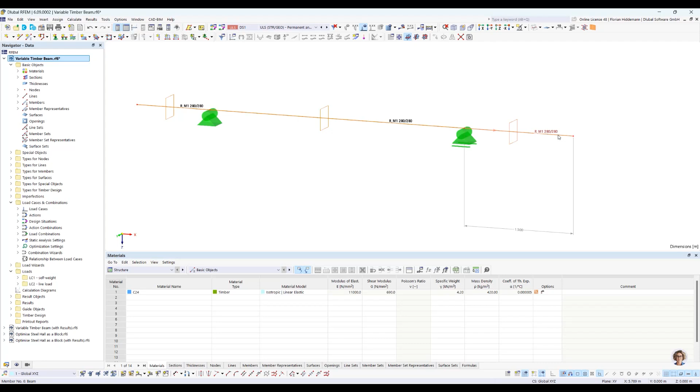So let's dive into the program. And as you can see here, the first model is a variable timber beam. This one has nothing to do with blocks at the moment. It's just for demonstration purposes of the new features I just explained in the PowerPoint. So what do we see here? We have an easy static system. It's a single span member, and at the ends there are some members reaching out on the left and on the right side. It's a rectangular cross-section. And of course, when we are dealing with optimization, there are some global parameters in use.

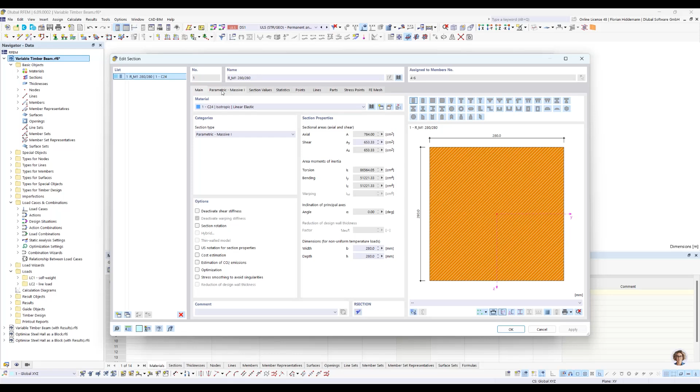So we start here with a 280 by 280 cross-section with C24 timber material. And as you can see here, the cross-section width is given with a global parameter and the cross-section height also. In addition to that, the distance of the right support is also variable. I can show you now here the overview for the global parameters. The beam length is just a constant, which is easier for me to make the model. And the left support distance here is just a constant.

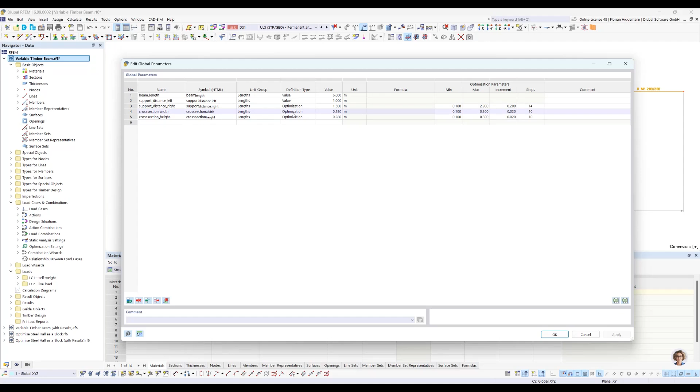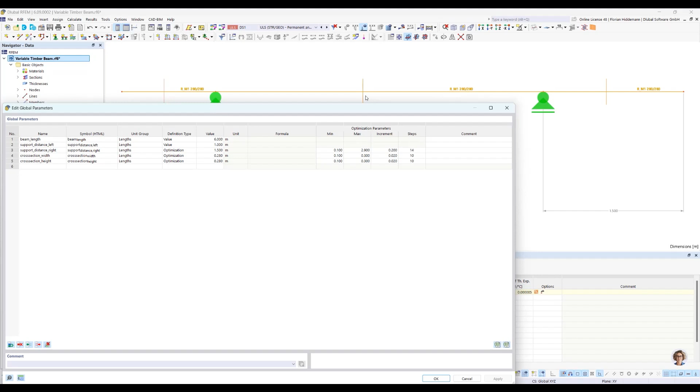And we would like, in this little example, to find optimal solutions for the right-hand support distance, which is now 1.5 meters, and for the cross-section width and height. This parameter here, the support distance, can be varied with 0.1 meter from the right side up to 2.9 meters, which is nearly in the middle of the beam. The cross-section width and height go from 100 millimeters to 300, in steps of 20 millimeters. So you have 10 steps in between, and this is the variation this cross-section can take into account.

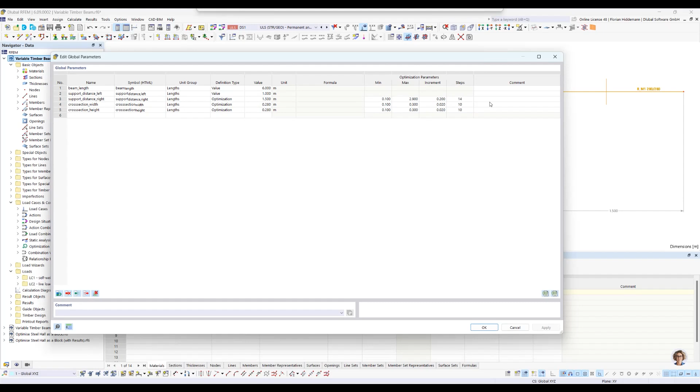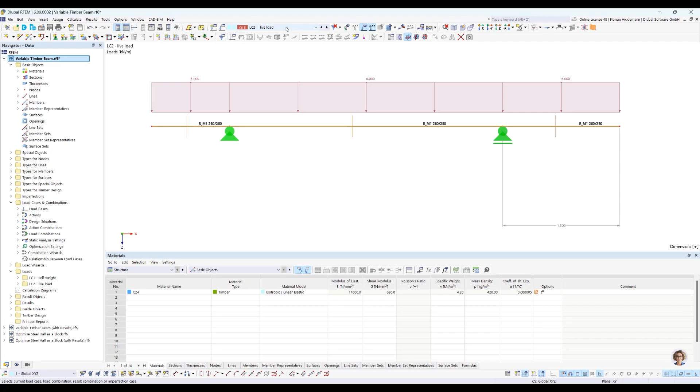So let's have a look at the first feature: recognizing valid mutations in the result list. So for this reason, I activated also the Timber Design add-on. As you can see here, Timber Design is activated. And I just made, for demonstration purposes, easy loads. You see load case 1 with some self-weight. And there's another load case with a live load. We use here the German National Annex, of course, and a combination with it. So you can see design actions. It's all standard, which you are maybe used to already, that we do some combinations and design situations for you.

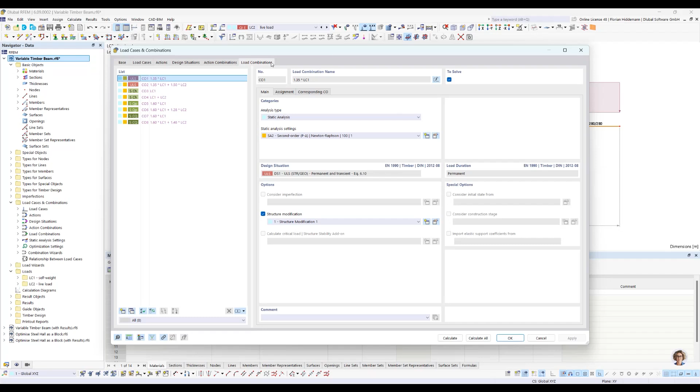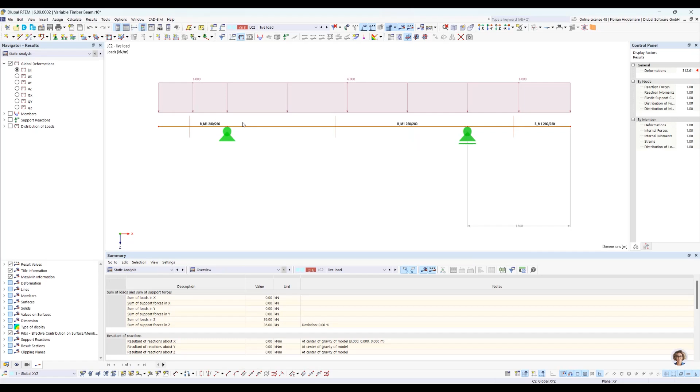So you don't have to worry about all the timber design specialties. So let's calculate the system in the first place to see what we are talking about here. So now it's a standard calculation without optimization. You can see in each run later on, all these calculations are performed for each mutation. And as we can see in the governing results of the design add-on, everything in this configuration looks fine.

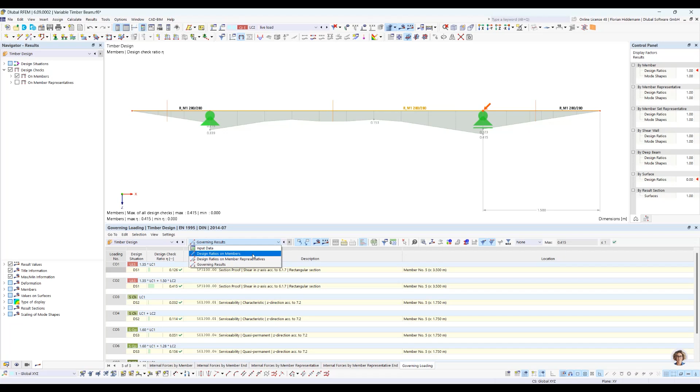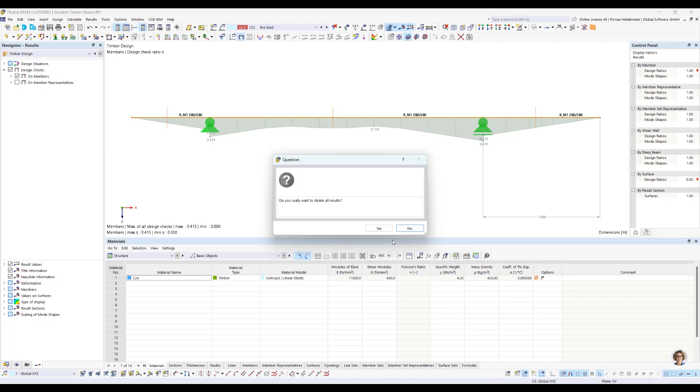But we are here to find out if there is an even better configuration or not, and to play around with our optimization feature to see what is happening there. So let's delete these results and jump into the optimization settings. You can find it here under Calculate if the optimization add-on is activated. So you can store different optimization settings. It's not necessarily one you have to fiddle around with. You can copy it, modify it, and use them for different purposes. This is quite handy because there are a lot of settings you can do, and so you can remember each different optimization run later on.

So what do we do now in the first place? This feature I show you later on. This is the multi-stage mode, the multi-stage calculation. And even with this very simple system here, all mutations would have a total number of 1,815 optimization mutations. This is a lot if you consider that this is a very easy and simple system here.

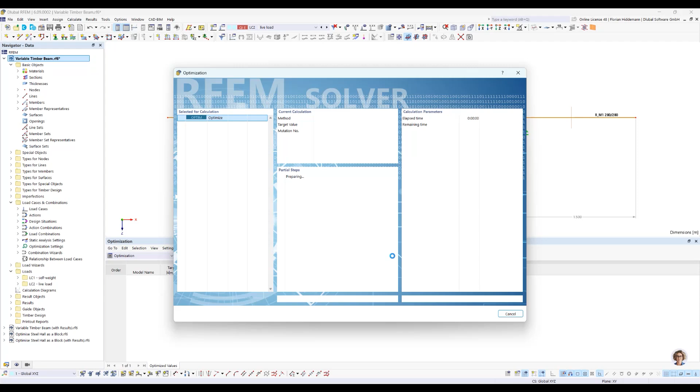So as you can see in the background, the first iterations are calculated. Each one of these mutations is also calculated within the Timber Design add-on. And for this reason, you see model number 1, calculated with these parameters, didn't fulfill the design checks. Model number 2, like in our first example, fulfilled it.

So with this algorithm here, it's just a random mutation. Here is no clear strategy for finding the optimal target value. The program at the moment is just giving random examples for these 3 values or parameters and collects all the results. So with this nice feature here, we can see easily which calculation fulfilled design checks and which not.

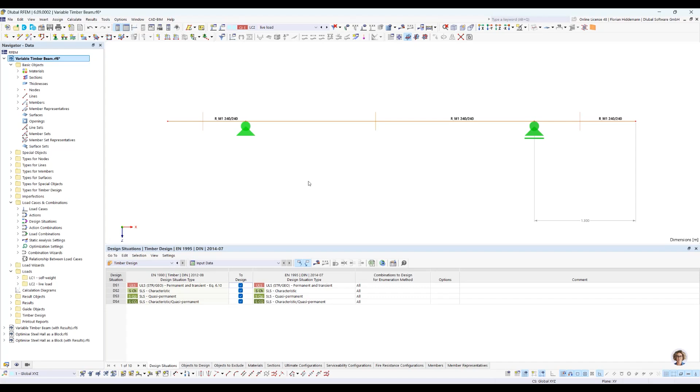And now if I cancel this calculation run here, today I will be mean to this model and cancel it anyway. So what you can see here, the calculations you performed up to this point are stored. We have now 8 results. And as you can see here, the green checkmark means, it's very important to see it again, this model is now active, and because I canceled the calculation run, the add-on doesn't calculate the last cycle. So if you jump into a new model in the list, you have to calculate the model itself.

We store only the results you can see here in the list. Obviously, we don't store every full result which is calculated for each model. If you have a bigger model, that would be hundreds or thousands of results. But we collect the target value and everything you need to display this result table here. From this point, you can then regenerate your model because the add-on is varying the parameters like they are stored here in the way the model mutation shows it.

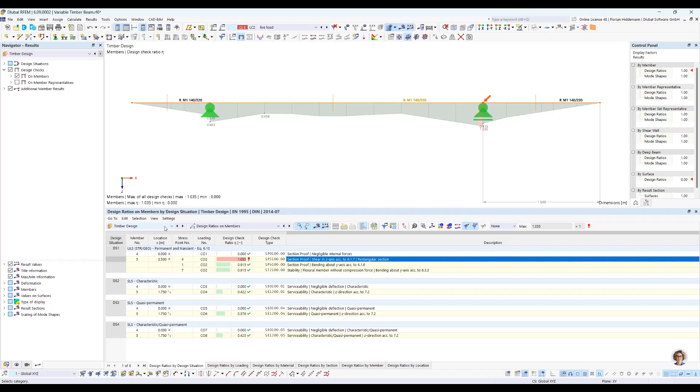The next feature, the results list remains consistent. It's easy to show now because I canceled the first calculation run, and maybe at a later point, for example now, we would like to go for a new optimization run. So all I do now is say, okay, try to optimize it with a particle swarm, calculate 2% of the possible optimizations. As every time, I make the optimization cycle here active. This is kind of a safety feature so that you are really aware you're performing an optimization run and not doing it accidentally if you calculate all.

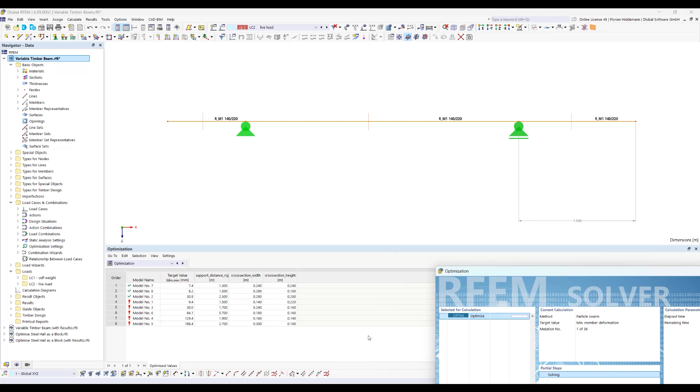Okay, so what will happen next? Let's see. You can see the results list here is stored. There is no new list, and this is a small feature, but very useful if you already spent some time with your model and calculated it, because now the optimization add-on checks each new mutation. Before it calculates it, it looks up the result table and sees if this mutation was already calculated upfront. If this is the case, we jump automatically to the next mutation without calculating it. And if the model mutation is a new one, which is not stored in the list, the add-on just calculates it and adds it, like you can see here in the background.

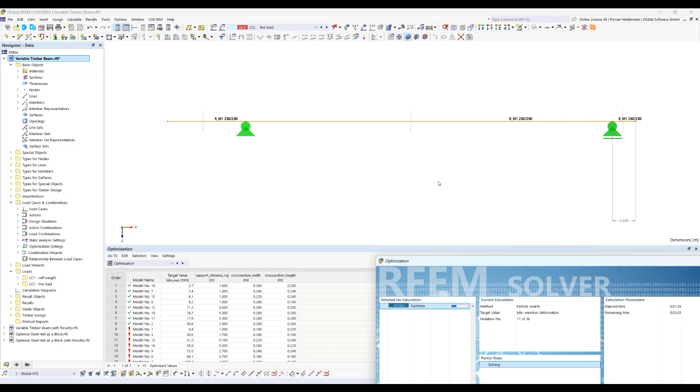So as you can see here, now it's more straightforward because the particle swarm is a solving algorithm which tries to vary these parameters with the target value in mind. And the more you calculate, the more it gets, let's say, a mathematical feeling for which parameter needs to be adjusted in what way to achieve the best target value, which is at the moment the minimum member deflection at every point. So the 2.7 millimeters, let's have a look into the program and cancel it again.

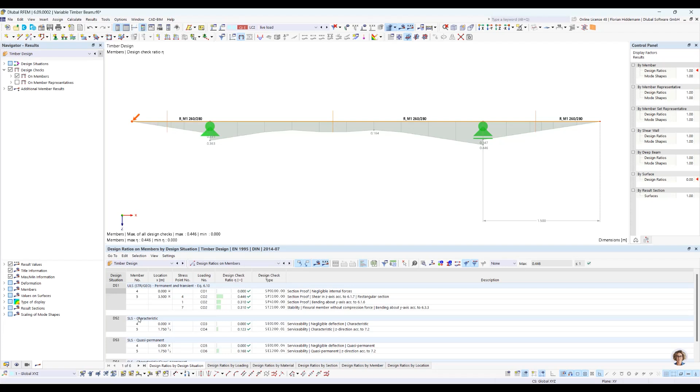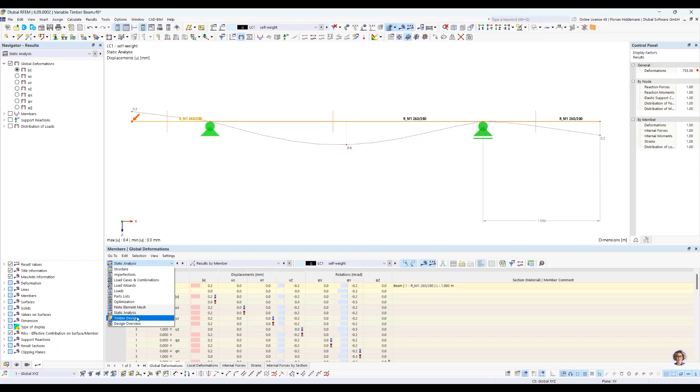Because we aborted the calculation, I need to perform a manual calculation of the system here. So let's see. Every design check is fulfilled. And for the target value, it should be there. I go to another model. Okay, yeah, I found it.

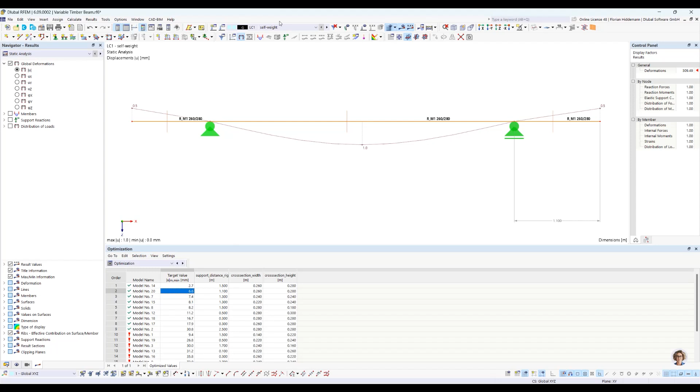Okay, we are looking for 6.6, and this is considered overall design situations. You set it up so if I go to the maximum load here in design situation 1, the ultimate limit state, here you can find it's this part here in the members, 6.6, and this is considered as a target value. It is looking for a global minimum to minimize the maximum member deflection at any given point. I give you some time to let it sink in.

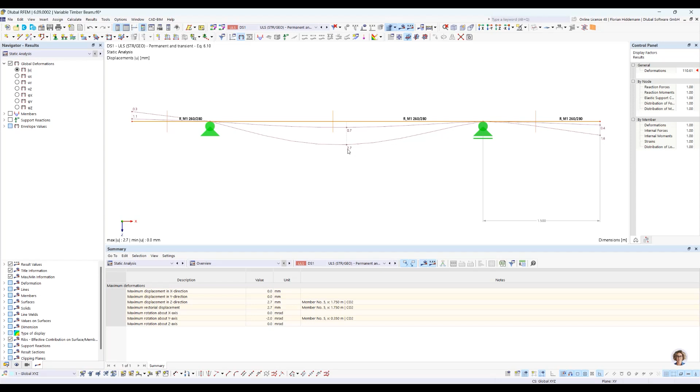And now we are able to find the 2.7 millimeters. Just to be sure what is going on here in the background: you can see the 2.7 at this point. So this is a small introduction example for working with the list here and the ability that it stores every optimization run. Let's go to the next topic, the sensitivity factors. What is going on with that?

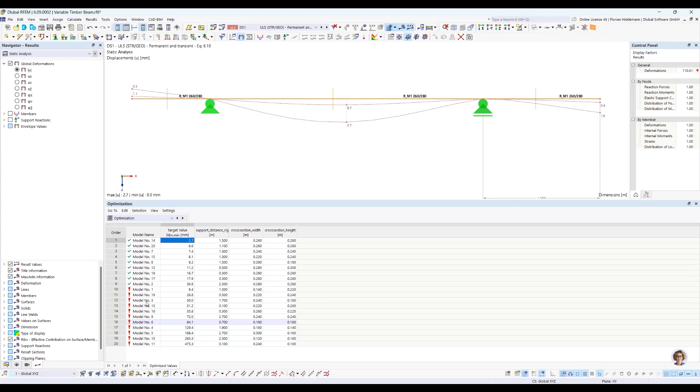In the model now, we have 20 model mutations calculated. And now here in the table of the parameters to optimize, you can see some sensitivity factors. They are now estimated from the model results list here. So we can now perform an analysis of how the target value is influenced by varying different parameters. This estimation gets more accurate the more models you calculate.

And with this small amount of 20 models, you can see the cross-section height has a big impact on the desired member deformation, a much bigger impact than, for example, the cross-section width. If you're familiar with how the stiffness in such a system works, that's absolutely plausible, because the height of a cross-section goes in with the third order, and the width with the first order, into the stiffness of this beam. So it's a very plausible result.

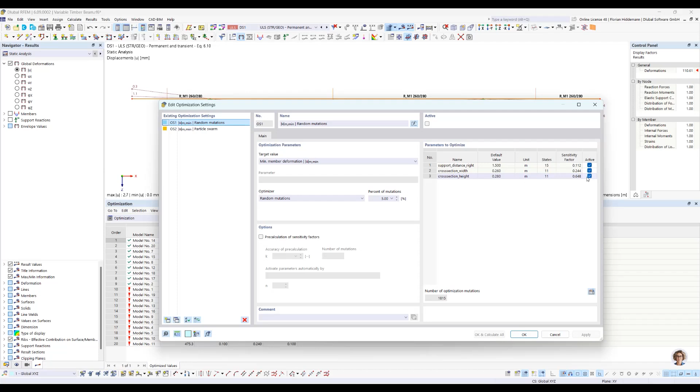And these two parameters here have much more influence than the support distance. That's something you can already see in this little model. Here, it's easy to have an overview by yourself, but think of more complex situations where you vary different parameters and you don't have a feeling what would happen if you vary different combinations. This is very nice to reduce the number of optimization mutations, because you can decide, okay, if these ones are so impactful, why should I vary and spend my calculation time on this one?

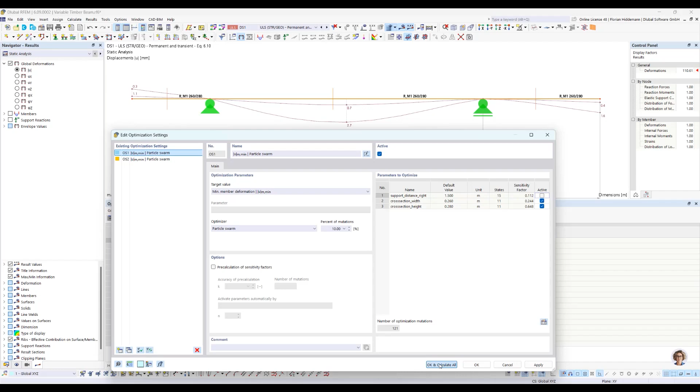And as you can see, it reduces the number of optimization mutations drastically, because now it's 11 by 11 and not by 15 anymore. So here we have 121 mutations. And this is much easier for the algorithm to find more potentially better mutations. So now, because I set only these two parameters as active in this dialog, the model fixes the 1.3 meter support distance and just varies the second and third one.

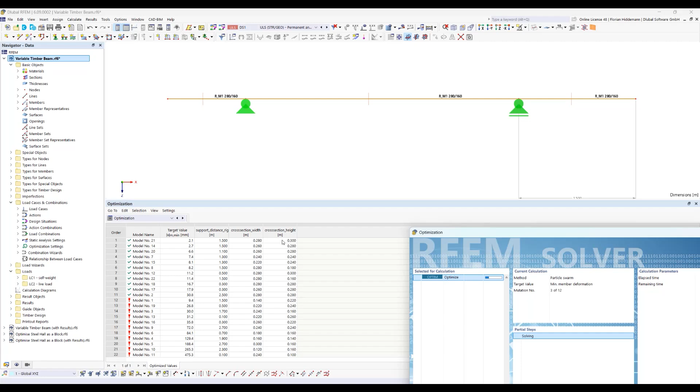Okay, this as a basic introduction and overview of our new features at this stage. I can show you the multi-stage calculation as well, and for this reason I would go back into the settings, choose other optimization settings here, and now we have a look at this option here, the pre-calculation of sensitivity factors.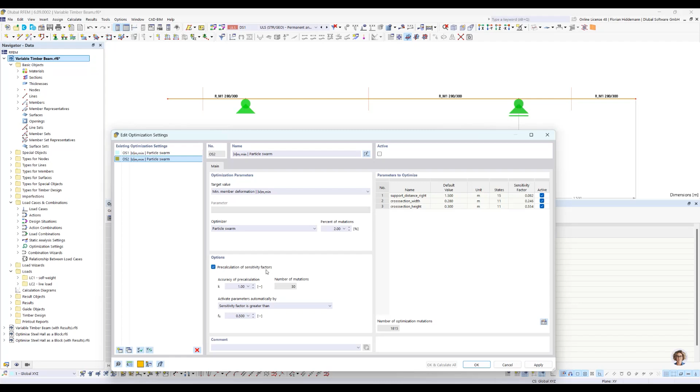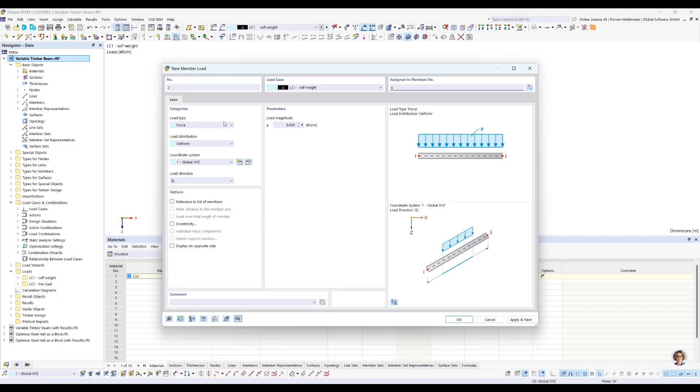For this reason, I will empty this list by varying the model. This is something you need to do now, because the list is stored. What I do now is delete a load here. And if you change the model in a drastic way like this, all the results are deleted. So be aware that this will have an impact on your optimization results. So now we can start with a clean structure here.

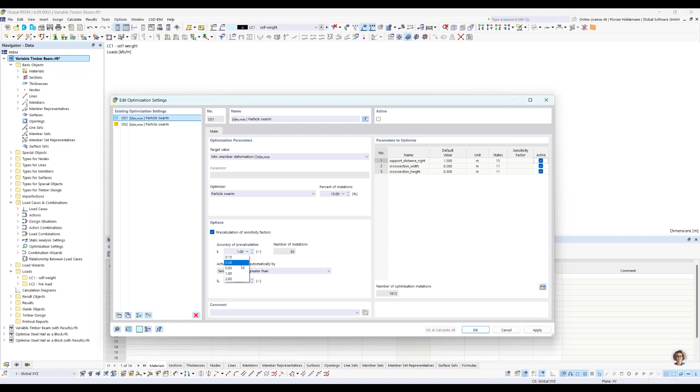And for the next run, I say, please make a pre-calculation of the sensitivity factors. And in this example, let me make only a small guess with, let's say, 5 mutations. And after that, the program should automatically combine 2 parameters with the highest sensitivity factors in each following optimization run. So it's a bit abstract and complicated, like most of the things with this add-on, but let's see what is behind it.

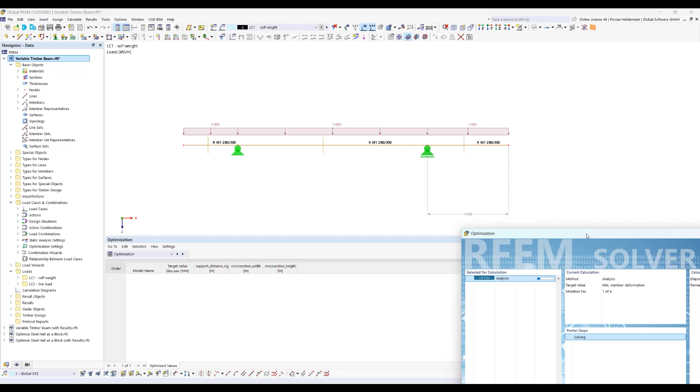So now we have a multi-stage calculation. In the first place, we are doing the analysis. So the model is now varying some parameters with a very small amount of models to guess the sensitivity factors. Yeah, it's analyzing the results here and the estimated impact of these parameters to those result values. And as said before, the more mutations you calculate, the more accurate is this estimation.

And now it goes to a second step. It uses now the results from the analysis. And here it is now combining the two most influential parameters with a particle swarm that calculates 10% of these possible combinations. And the 10% is now only 16, and it's not 181. I'll show you it afterwards.

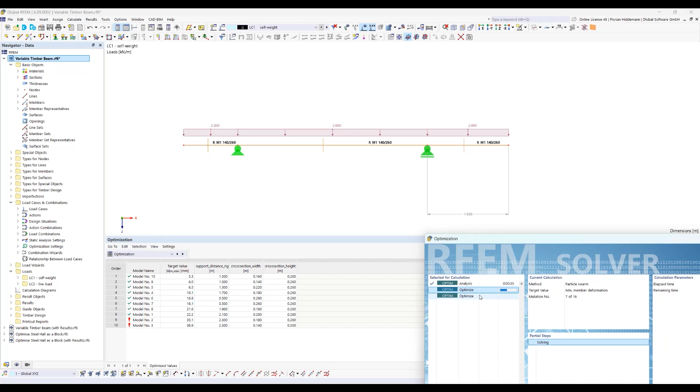And you can see after this optimization run, there is another optimization run waiting. In the next optimization run, the program goes further and says, okay, I have now combined the most influential with the second influential parameter. And just to check it in another run, I perform a calculation with the second best parameter and with the third best, because you choose to combine two parameters at the same time. And this is the strategy the program is choosing to go through these combinations.

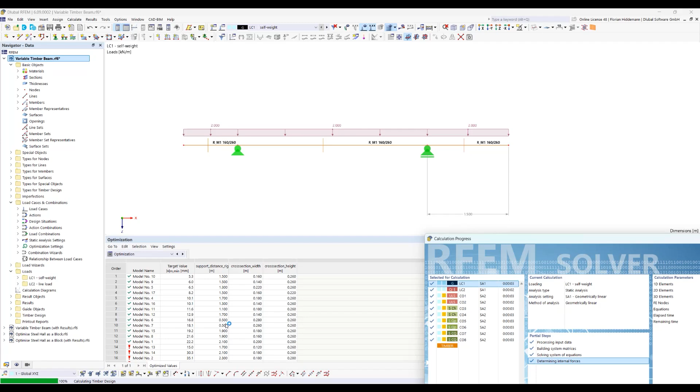So the total amount of calculations is the first one from the sensitivity factors, 4 in this example. And after that, it's here 16, and then depending on the other value, around 15 to 20. And it's much less than 10% of all 1,800 model mutations. Interesting. So let's have a look into the dialog, what could happen here. As you can see, we have with only 17 calculations quite some optimized results.

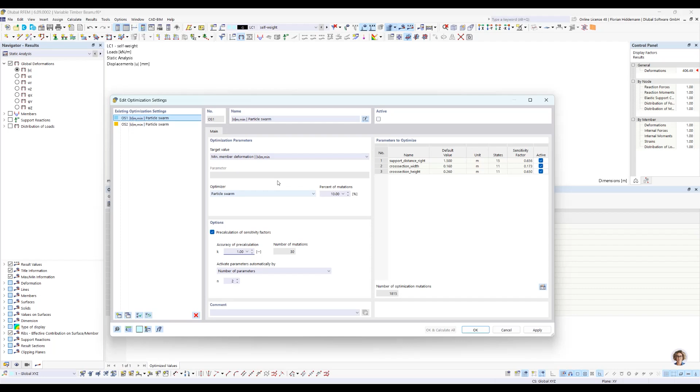But with a small amount of calculations, the sensitivity factors are not guessed very properly. Here it's now a very big difference on these ones. And you can do it better by giving more accuracy of the pre-calculation with, for example, 30 mutations. So our recommendation here is to choose higher numbers if you feel the calculation is not so straightforward. But this for now to demonstrate the possibility of our multi-stage calculation run.

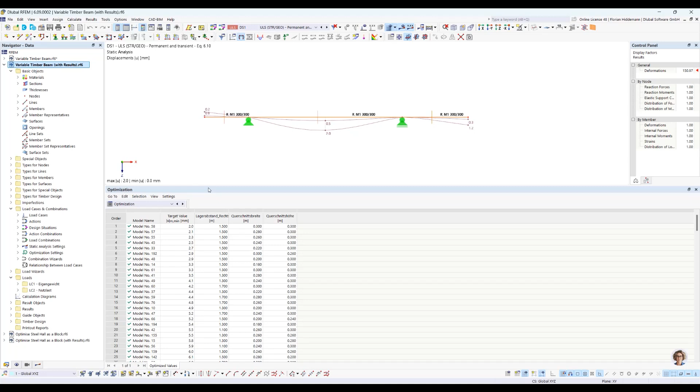If you have already done more calculations, I switch to the same model here. And I did a pre-calculation. So we have here 217 calculated models. As you can see, the sensitivity factors here are more accurate now, because there is a big result list which is analyzed. And this is much more plausible from an engineering point of view. What is interesting now, that's also a nice feature. It's new because we have a consistent result list now. You can change the target value afterwards.

So for now, we did the minimum member deformation at a specific point as a target value. So obviously the height of the cross-section, the width of the cross-section, and the support distance. I'm sorry that these are German words here. If I had translated them, the results would be deleted because it's changing the model. So I'm sorry for that, but I hope you can go with me. This is the support distance on the right side, the width of the cross-section, and the height.

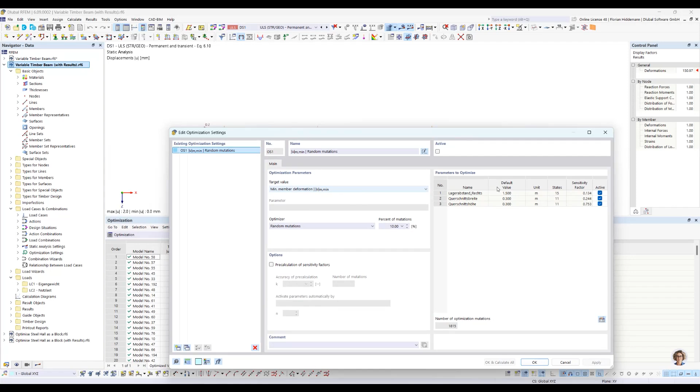And obviously, the support distance should have no impact on the weight of the model, but the height and the width should be more or less equal, right? Let's check it. We switch now to the minimum total weight. And as guessed, these sensitivity factors are now changing, because if you are varying the width and height, these influence the area of the cross-section in the same way. And guessed correctly, it's quite equal.

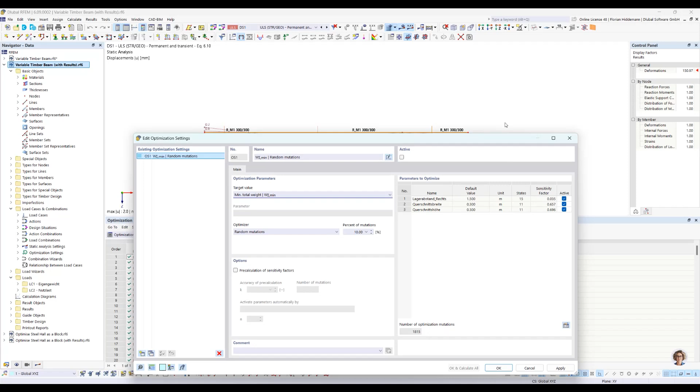And the supporting distance here from the right side has in reality absolutely no impact on the weight of the construction, because it's just a load bearing point. What's interesting, the more you calculate, the more this value will go to 0, because it's an estimation based on the list here, and our algorithm is already seeing with this amount of results that the influence on the desired target value is very small. So this is quite nice to see what you need to vary in your model to achieve specific targets.

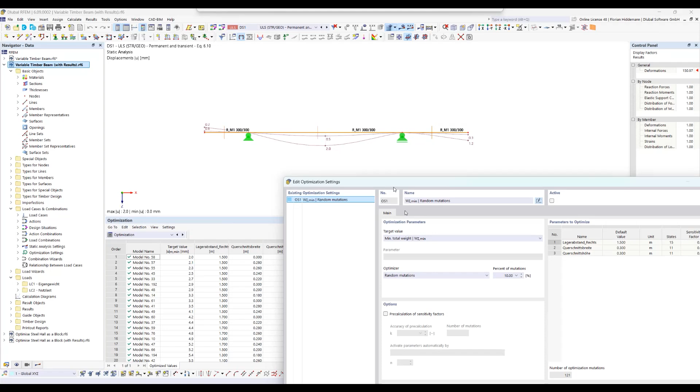You can see here in the list, if I change the optimization value and start a new run, so let's do it with a particle swarm. Just started. Let's see what happens. It's now changing. And this is also a strong feature. You can use all your existing calculations for this. So we have now 200 already existing calculations, because we stored the target value in each previous optimization run, as well as the desired minimum deflection, if there are surfaces, the minimum surface deflection, and so on.

So every available target value is stored with each mutation, even if you didn't activate it in the dialog. And this is very useful if you have different perspectives on your construction and you want to try out which one is the best for the minimum total weight and which one is the best for the minimum deflection. It's the first step into multi-target optimization runs. Behind the scenes, we are already thinking about those features, but it's a step-by-step way going to these goals.

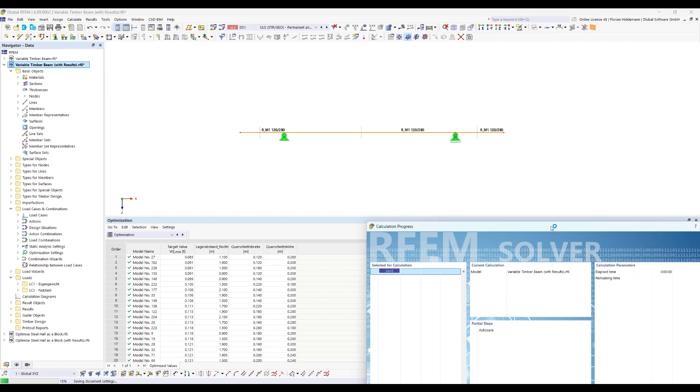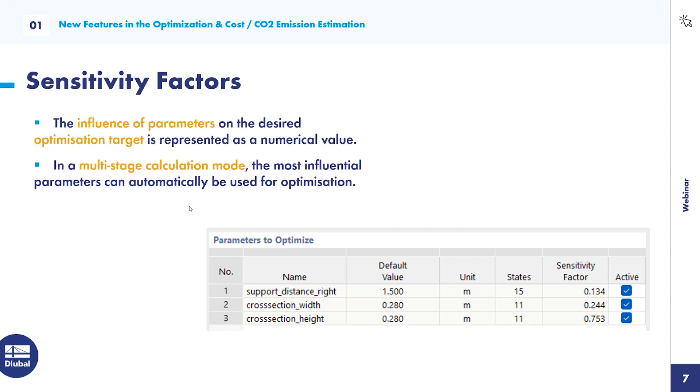Okay, so now you saw everything. We can change the optimization targets. We store it across different optimization runs. We have a multi-stage calculation mode, and maybe you are already waiting for the title-giving feature of this webinar, the optimizing blocks.

This is just an inspiration because maybe you found out in the past, if you are working with global parameters, there are some restrictions, because global parameters are very, very useful to play around with the geometry of your model. And you can use it in so many input fields that are quite helpful to steer your model and create the geometric system you would like to have, and also add static values, resistance values in many different ways.

But maybe you experienced also some restrictions when it comes to demanding construction rules. If you have a more complex statical system or construction you want to try out, you can use a block, because blocks are perfectly fitted to generate your model with your own specified rules, algorithm, programmable. With a block, you can build your own configurator. And this configurator for itself takes input values.

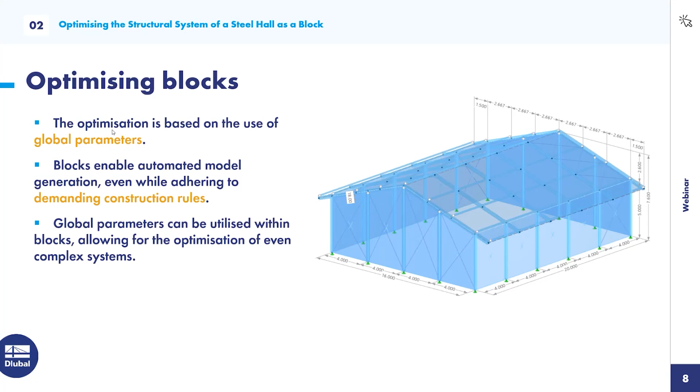So at this point, I would like to make some advisement for next week. If you didn't have any contact in the past with blocks, in 1 week, there is a webinar from Andreas where he presents some features, including also the blocks in a more detailed and specific way. So if you're interested to see more of blocks alone, maybe you can join the webinar next week if you have time. And for today, I will show you how to use the optimization together with a specified block.

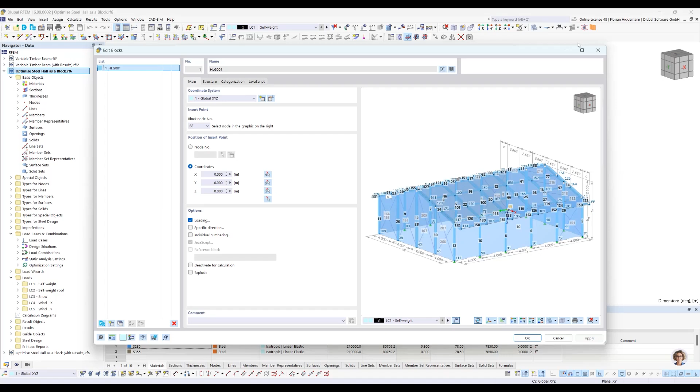So I've done some pre-work here because this needs some time to set it up. And so I would like to present what I did here and to show you what is special about this model. So in this model here, as you can see, this is everything. It's a block. In the webinar next week, you can see, if not already known, how to edit it, how to import it from the Dlubal Center. Here for the moment, let's just stick with the idea.

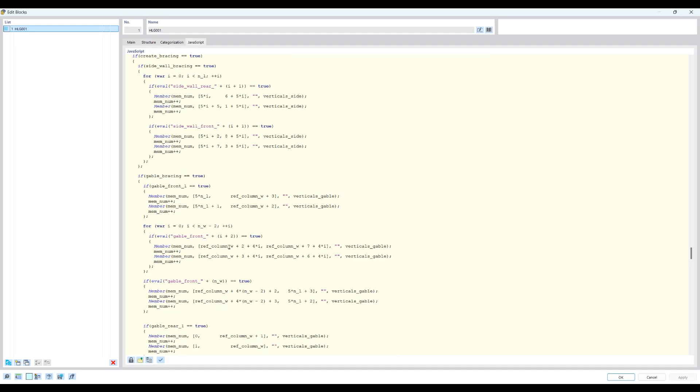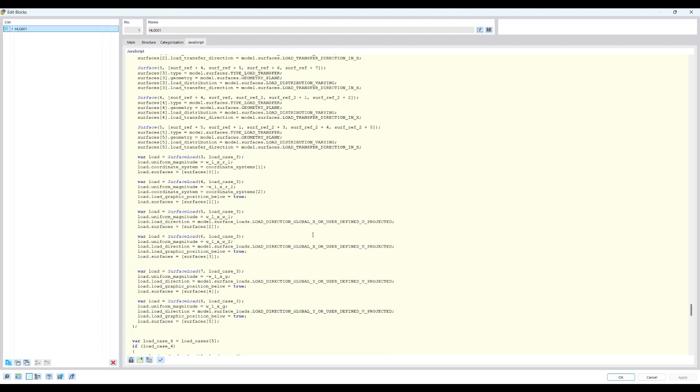A block is a programmable object where you can define in JavaScript what is generated, what is steered. It's using internal features of our programmable API. And here at the moment, what you can see is JavaScript used as a language for this. So as you can see here, the whole steel hall is defined with these functions and API calls.

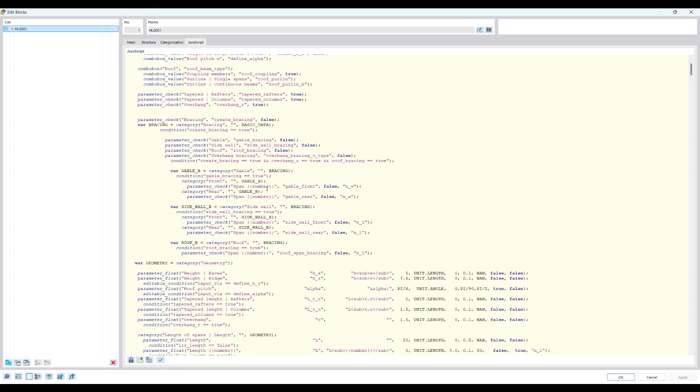Based on the structure here, you also define a parameter structure, and depending on what you are programming for the block, you have now your own input fields you use in your program. And this enables you to work with more complex structures. For example, this block is programmed in a way that automatically a bracing is activated here. You can see it here.

If I unclick a checkbox, the bracing is updated. Yeah, it generates in the background a totally new model. The numbering is different. Everything is different. So have in mind that you can play around with this, just the borders within your fantasies and our abilities to work with JavaScript, obviously. But you can really do some fancy stuff with it.

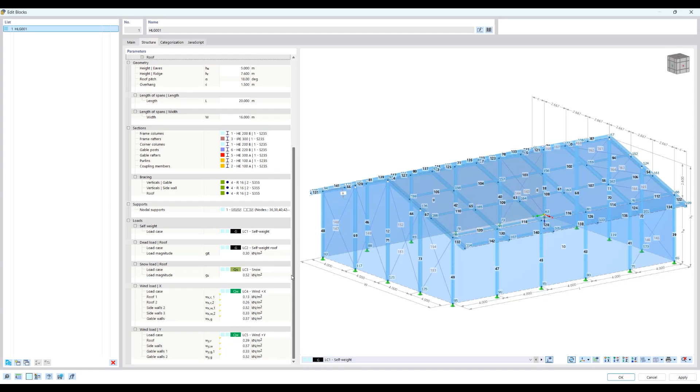I set it up here, the input fields, to connect it with the materials, cross-sections, and everything which is in my model. And just here for the, let's say, a pre-calculation as an example, I added some easy and, yeah, it's leaning into a realistic load case scenario, but we are not rebuilding here our wind load generator or snow load generator. This is just for a demonstration purpose and to give you an idea what is possible with blocks.

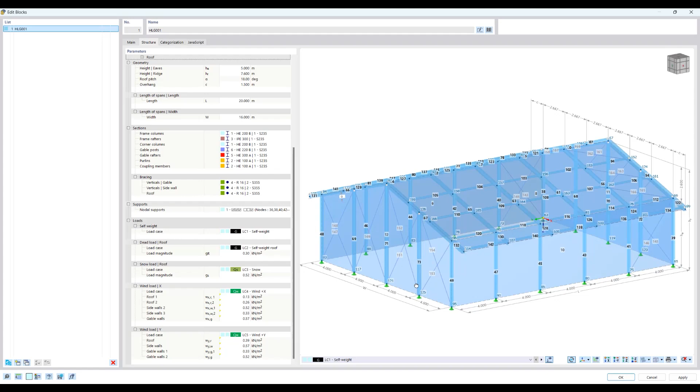And yeah, if you have an engineering problem which is worth spending some time with, which you are doing with a lot of repetitions, or you need to optimize it and there is something you would like to dive more into, have in mind that you can program a block and then connect it with a global parameter. That's a trick for today here.

I can just edit, for example, the number of spans in the width. So let's change this to 6. And we will see that here in the gable walls, the members and the bracing have changed completely. The whole structure of the steel hall is now different. I go back and change it to 4.

So what I've done here is you can just use a global parameter in this input field. And as global parameters here, I have defined the span counts in the length direction and the span counts in the roof. Yes, and those values are defined as an optimization type. So this is a trick for today. We will optimize and play around with the span count, length, and roof, and vary them from 3 to 8 and 5 to 12.

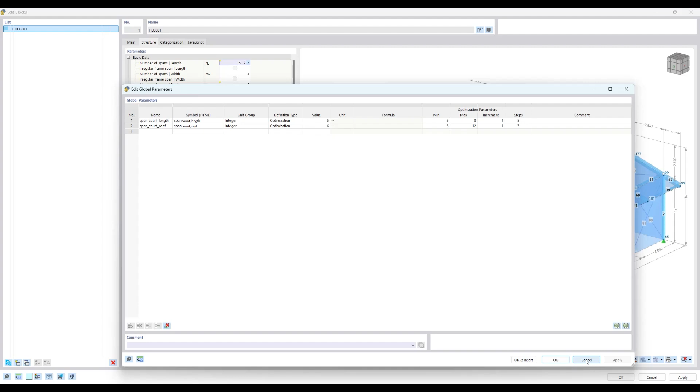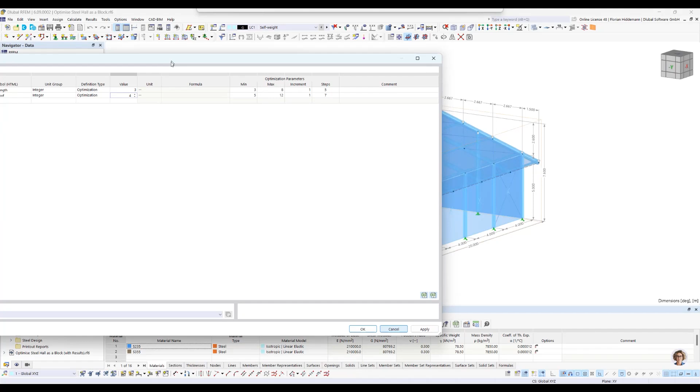It's 5 by 7 steel halls you create then in the background, and I will show you what is happening then if you use it in this way. So let's just go back here. Now, as explained, you can see in the construction what is happening. If I change this to 3 and this one maybe to 4, it's reconstructed.

And this is, I think, a magic way to define even systems with different statical conditions, everything that can use a number, a Boolean variable, whatever you can use later on in a block, and design complicated algorithm-based construction rules. And together with the power of the optimization tool, you play around with this block to achieve a global state of optimal target value.

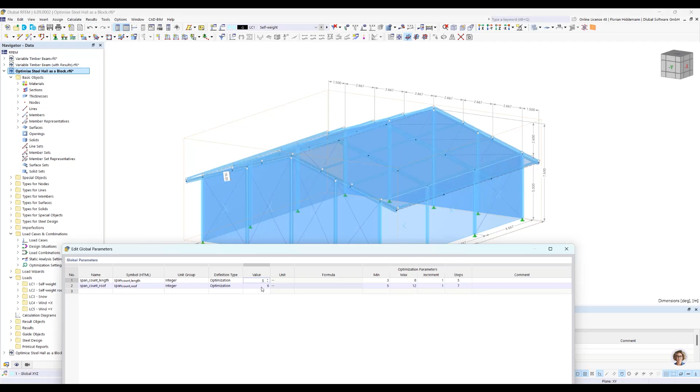So let's go back and start with maybe 5 and 8. So I press apply and you see it's a totally new construction. So, but it, oops, I disconnected my table here.

This looks interesting, maybe, and I don't want only to consider different field spans, because if I choose fewer fields, I need stronger cross sections. And otherwise, if I have more fields, I would expect that my cross sections for the columns and the bearings here on the coupling members have to be much smaller. So don't forget, you can use our optimization add-on in combination with cross sections.

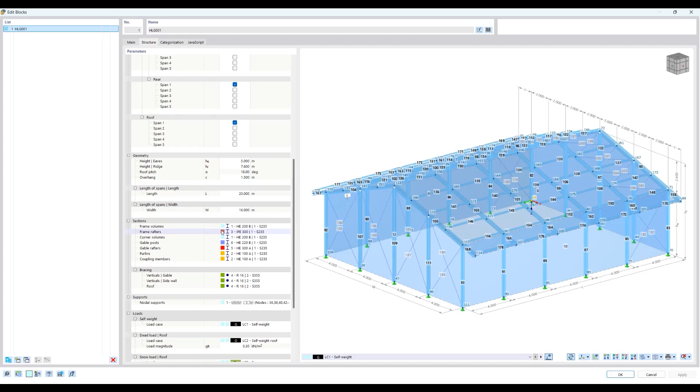So let's say I want to use these cross sections in my block, and again everything is generated and defined by one block you can see here. Yeah, I connected these cross sections here to the code in the JavaScript. And now I can go to RFEM and say, please optimize this cross section I used. Yeah, you only have to click here. And this enables the optimization feature for this member.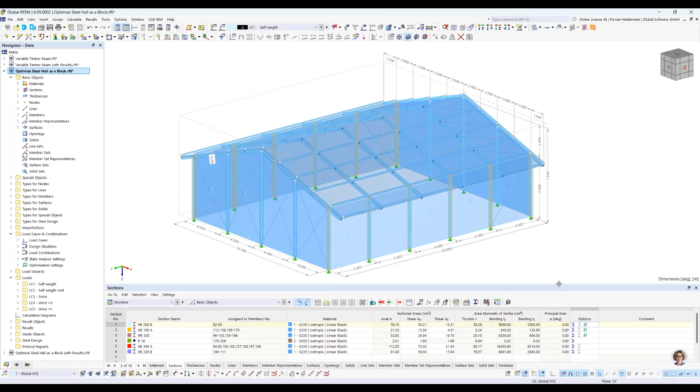Let's jump in the optimization settings. Here you can see, yeah, let's try it out. If you combine only the states for the length and roof, you have 48 steel hulls, because it's taking also the minimum value and the maximum and the steps in between into account as a state. And if you multiply it with all possible variations of the cross sections, you get almost 500,000 possible steel hulls. And who of you wouldn't like to calculate them all by hand? For me, at least, it would be painful.

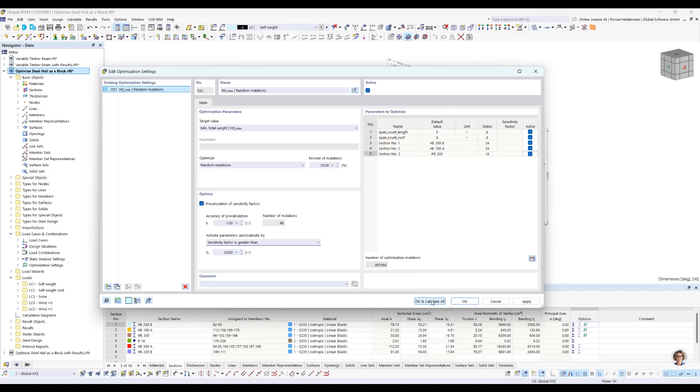So I rely on the multi-stage optimization run and want to see if there is some construction winning the game for a minimum total weight. I want to have calculated in the later run only sensitivity factors which are greater than 0.5. And in the first run, pre-calculated with 48 mutations. So let's just test it. Now, I'm totally aware that this is not the end of the story.

If you have a system which is quite optimal in this way, and you have done many steel halls or comparable projects in the past, of course, you have to work in a more detailed and specific way later on. But it gives an idea what is possible if you program complex structures, because you can define almost everything which a design add-on is also needing in the background to evaluate this hall.

And remembering our little green and red indicators here in the resulting list, the green arrow means that the first steel hall here, it's obviously heavy, but yeah, it's a first random mutation. This one is fulfilling all activated design verifications from the steel design add-on.

So imagine you have a very complex structure with different blocks. You can put a steel hall as a block into it. You can put a small next building as a block next to it. You can adapt some staircases as blocks. There are a lot of possibilities, and steer them all by global parameters and then vary some calculations to get an idea, let's say in the first stage of your engineering progress, to try out different designs and find out what is going for a most efficient design.

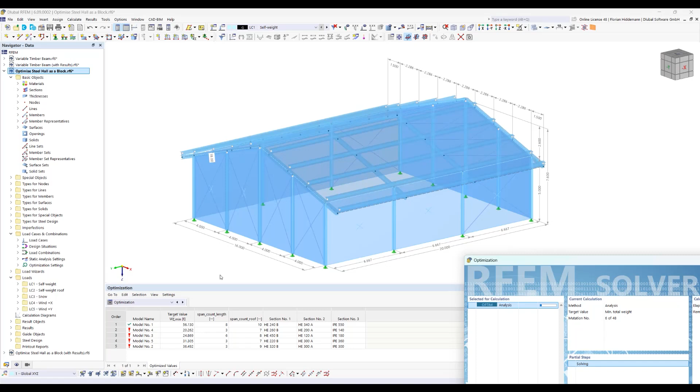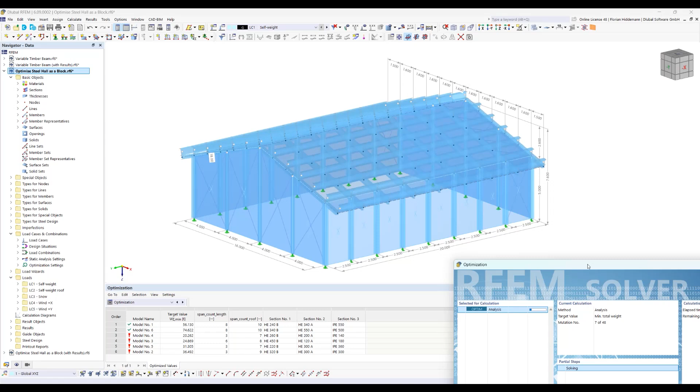So yeah, this is happening here. And after the analysis would be done, the algorithm would then choose every sensitivity factor over 0.5 and combine it later on. It will do after this optimization run some other stages, but for the moment, please have in mind the new feature is multi-stage. It's faster than only a single one with 500,000 possible combinations because it is more target-oriented, considering the most influential parameters and only combining them in different multi-staged calculations.

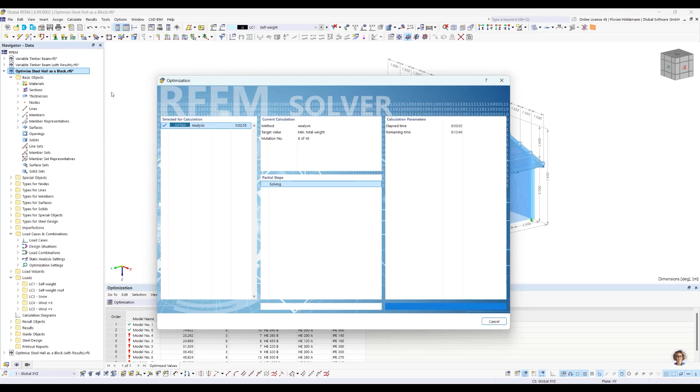So in the end, let's have a final look into the results I calculated with the steel hall in 3 to 4 hours on my laptop to see what is possible. In preparation of this webinar, I calculated this model here as well. We have 840 calculations. I think it took around 3 or 4 hours with the laptop. And as you can see, it's a very big variation of valid and non-valid models.

And the worst valid model is 100 tons with obviously a lot of fields and HEB 1000, some big profiles. It's safe to be in it, and maybe a bit heavy, but you can also go down to 16 or 17 tons for a 20 by 16 meter steel hall.

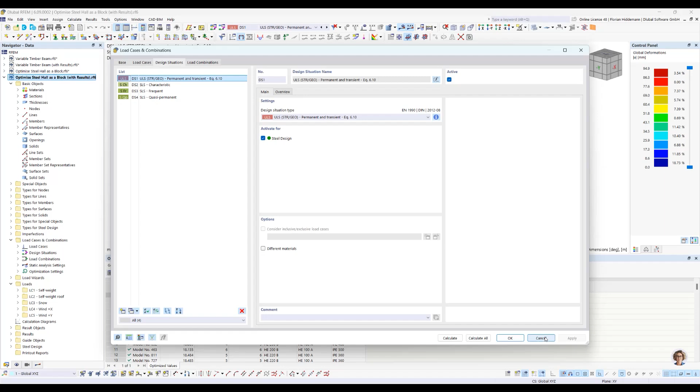And yes, I have to say, in this optimization run I have only considered some ultimate limit states. I deactivated the other design situations for time purposes, but if you use it and let it calculate overnight, you can activate everything you need for a real-life calculation you are using with RFEM every day. It's just more time consuming. But if you don't want to spend time on your local machine, remember you also have the possibility to calculate in the cloud.

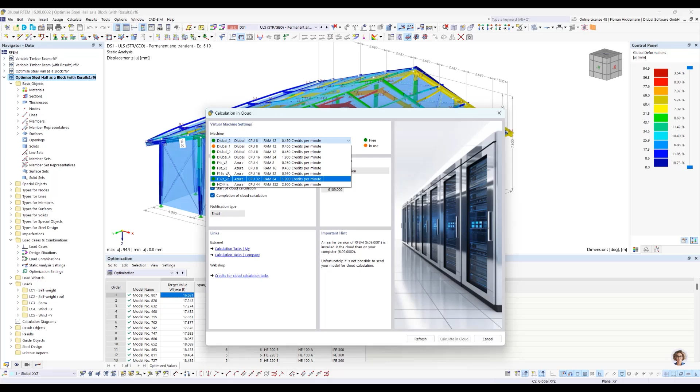Next week, there's a nice webinar: cloud calculation and blocks. So you can also go to the cloud, and you then have these machines available. You can put your system into the cloud calculation, let it calculate, and get the results after that. And it's then maybe a better inspiration how to adapt improvements on your model with this technology.

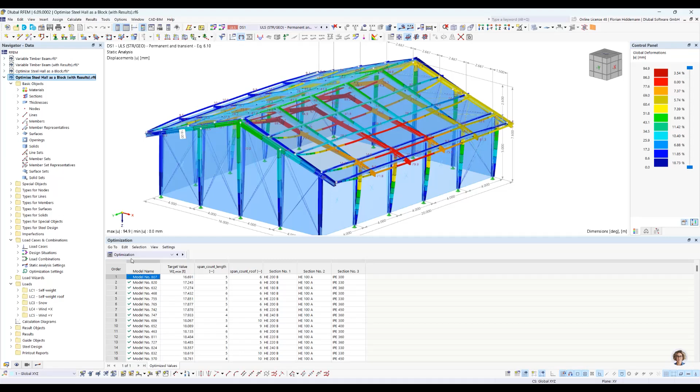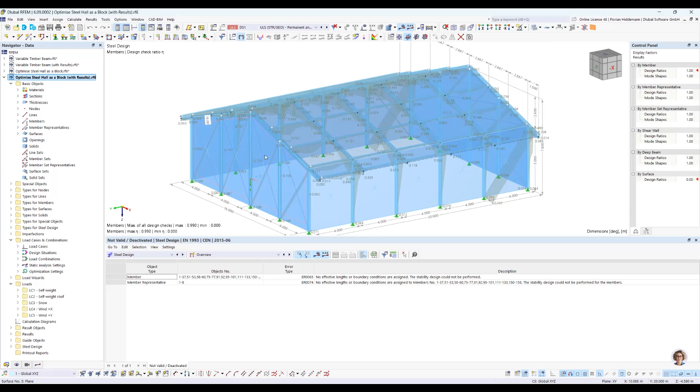And let's have a final overview from steel design. In the block, there are no effective lengths defined. You can, of course, do it. In the preparation of this webinar, we just didn't do the whole job to add imperfections or stability cases into the members, but you have here a full check of everything else according to Eurocode 3.

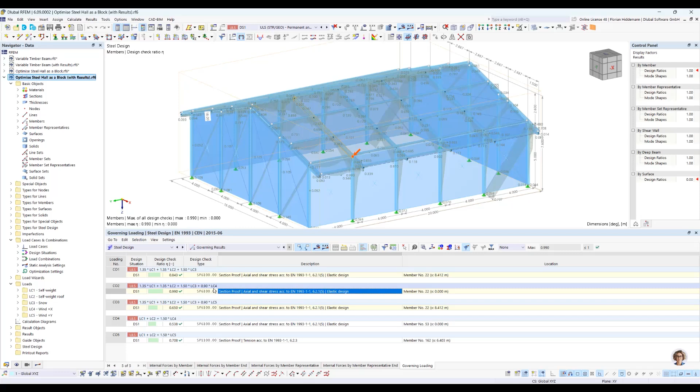And as you can see, the best hall here with nearly 16.7 tons fulfills the design checks, with a maximum utilization of 99%. So this should be it within the time of 1 hour.